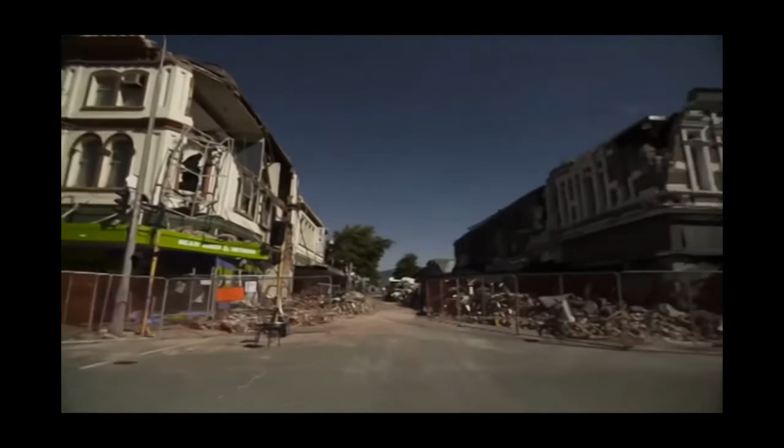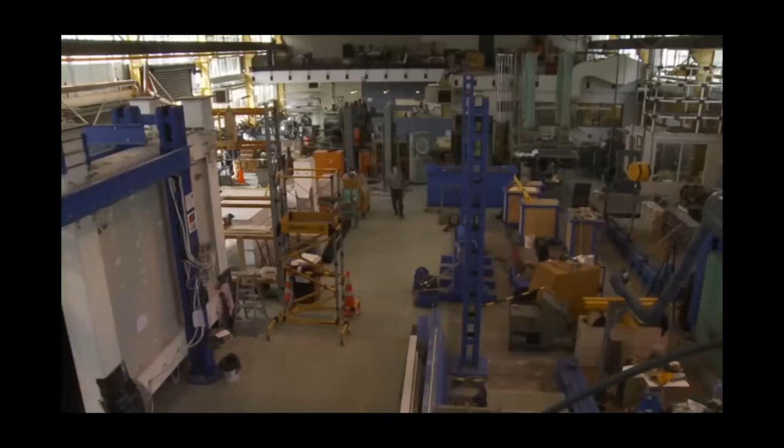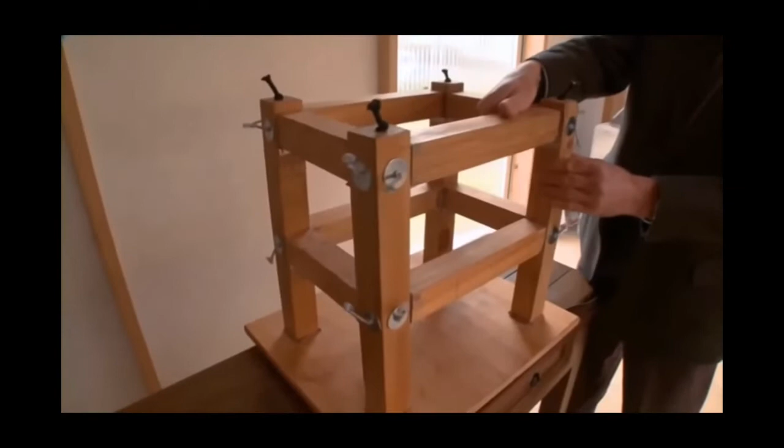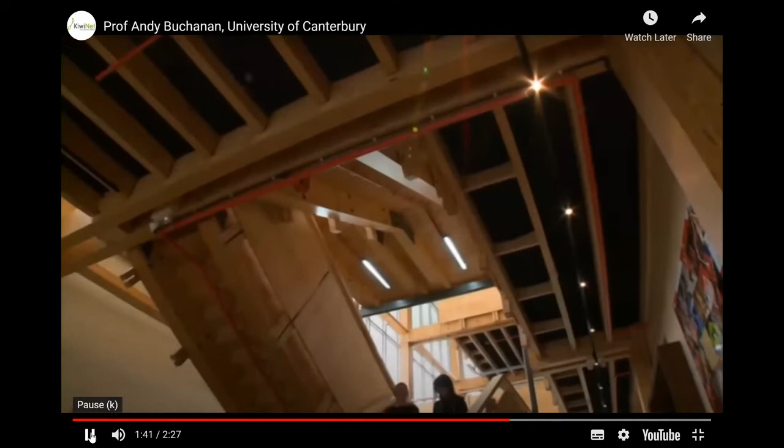Professor Andy Buchanan from the University of Canterbury is a world-leading researcher in the use of timber in earthquake-resistant buildings. 10 years ago, when we were doing earthquake engineering research, we realised that we had to somehow come up with a way of designing buildings that wouldn't be damaged after the earthquake. And the concrete people were doing it, the steel people were doing it, and we said, let's try it in wood. And the whole idea was this: if we have an earthquake and the building gets shaken about, it snaps right back to where it started. Well, I've been lucky enough to travel overseas with Andy to Canada and Japan, which are both wood-centric economies, and also they've got a very severe earthquake problem. And he's a world guru, basically. We got $5 million of industry money. We went to the government, they matched that money, and we then had an R&D program which has resulted in buildings like this. It's a renewable resource, it's sustainable, it's lightweight, it's strong. In terms of earthquake performance, or fire safety, or cost, wood can match steel or concrete. But in addition to that, we've got the low energy and the low carbon footprint of the wood buildings. Working with industry from day one, Professor Buchanan is creating technologies that will change the way timber is used in construction around the world. The university got involved because it could immediately see that there was commercial potential out of research. The world is watching what's happening here in New Zealand. Timber buildings used to be thought of as 2-3-story buildings. Now there are 5-6-story buildings. There's a 10-story building just been finished in Australia, even 30-story buildings in wood. There's this enormous demand for tall timber buildings around the world for reasons of sustainability and renewability and low carbon. But what the world doesn't have is a way of making these buildings earthquake-proof. So that's what we've got. Technology is so good it'll become a worldwide phenomenon. It's a perfect example of what can be done with clever scientists at a university, aided with a commercialisation function, meeting a market need.

So moving on from Andy's career at the university, he's since gone back into commercial practice, and I've certainly appreciated the sort of case studies and fantastic examples that have been coming out from his business in recent years since that video was shot. So without further ado, I'll hand over to Andy to bring his presentation. Thanks, Andy. Let's go, guys.

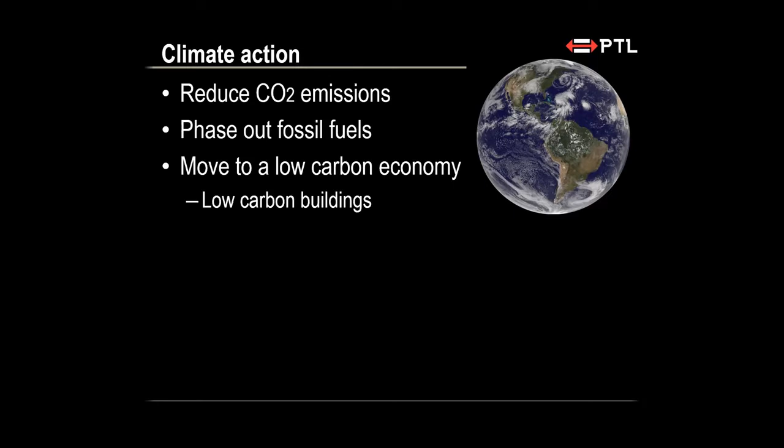If we think about climate action, you know all this. There's enormous pressure on us to reduce carbon dioxide emissions, and the only way to do that is to phase out fossil fuels. Of course, we can plant a few trees to offset, but that doesn't solve the problem. We have to stop using fossil fuels, and we've got to move to a low carbon economy. And the thrust of this talk is using low carbon buildings as part of that low carbon economy. And I'm going to quantify all of this, and let's see where we go. So what I'm really talking about is very simple. We're just talking about using wood instead of concrete or steel.

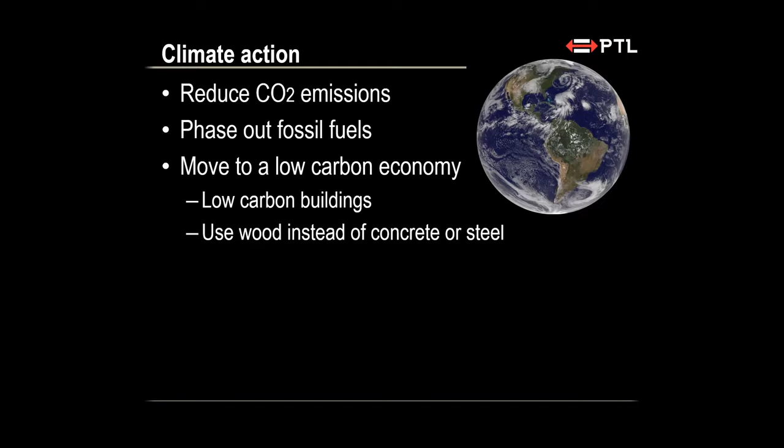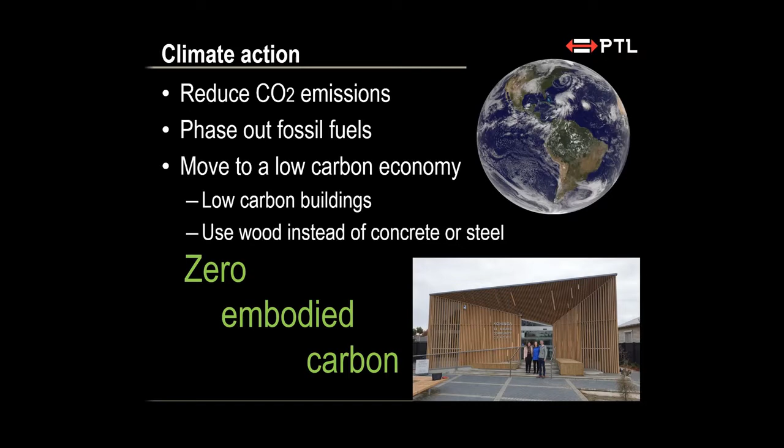And what we want to be able to do is to make buildings which have got zero embodied carbon. So I'm really just talking about embodied carbon, which is the carbon consequences of producing the building materials. And so this little building you can see there, I'll give a little case study of that later, but that's the St Albans Community Centre in Christchurch. And there the carbon sequestered in the wood, or stored in the wood, more than offsets all the carbon emissions from making the other materials.

So let's go ahead. As I said, I'm now talking about embodied carbon emissions using low carbon materials. And there are two parts to it, because there's what we might call the storage effect, or the biologists talk about carbon sequestration or sequestered carbon. And that's the carbon which is stored in the building materials. In addition to that, there's another benefit, which is what I call the substitution effect, because if we use wood instead of steel or concrete, then we have substituted, and that means another contribution that hasn't come through. And so I'll talk more about that as we go on.

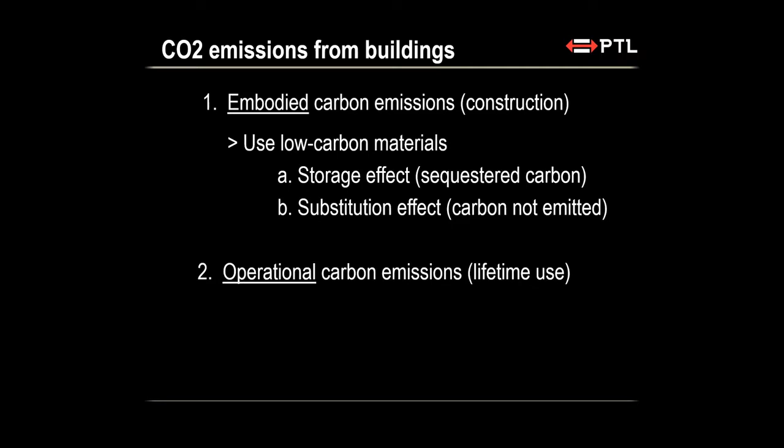Now, of course, in terms of the carbon footprint of a building, the embodied carbon is something which happens when the building is built, and it's there as long as the building exists. But in addition to that, there are the operational carbon emissions for the whole lifetime of the building. And I'm not looking at those now. What I'm doing in this talk is I'm only looking at embodied carbon, but I have to acknowledge that if we want to have low carbon buildings, we've got to go to a lot of effort to provide thermal insulation and manage the energy so that we reduce those emissions as well. And of course, that can be done with passive houses and other such technology.

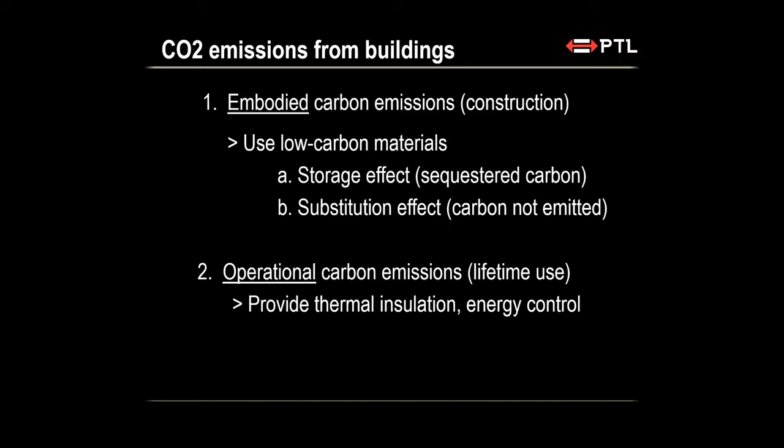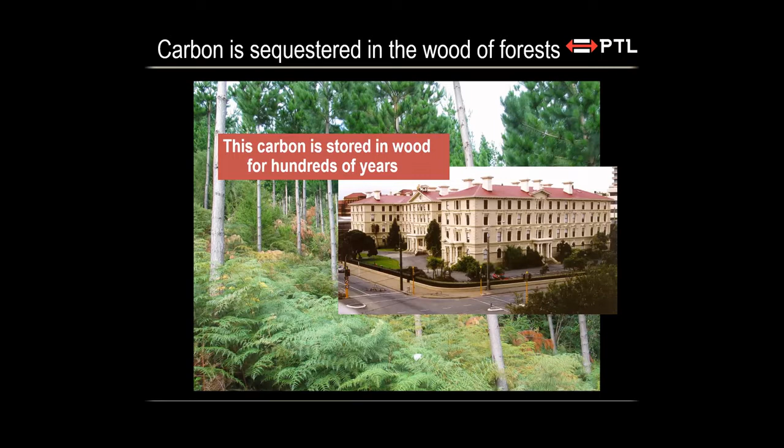The carbon lasts for hundreds of years. You all know this building, the old government buildings in Wellington, is 150 years old, and the carbon in that wood is still there, just as it was when the building was built. Let's just have a few numbers on this. Dry wood is 50% carbon. Of course, wood is a complex organic material. It's made up of cellulose and hemicellulose and lignin. Those are all organic compounds, but half of it is carbon. And a cubic meter of dry wood weighs half a ton, 500 kilograms. And half of that means that it stores 250 kilograms of carbon, C.

Now, carbon accounting around the world now is not done in terms of tons of carbon. It's done in terms of tons of carbon dioxide equivalent. So we've got to take the 250 and multiply by 44/12, because the atomic weight of carbon is 12 and the atomic weight of oxygen is 16, and so CO2 is 44 and C is 12. This is a simple calculation, but some people who are doing calculations of carbon offset forget to do this. So it means that the 250 kilograms of carbon in a cubic meter of wood is about 920 kilograms of carbon dioxide equivalent. So 1 cubic meter of wood offsets about 1 ton of carbon dioxide. And that's the sum that gets done.

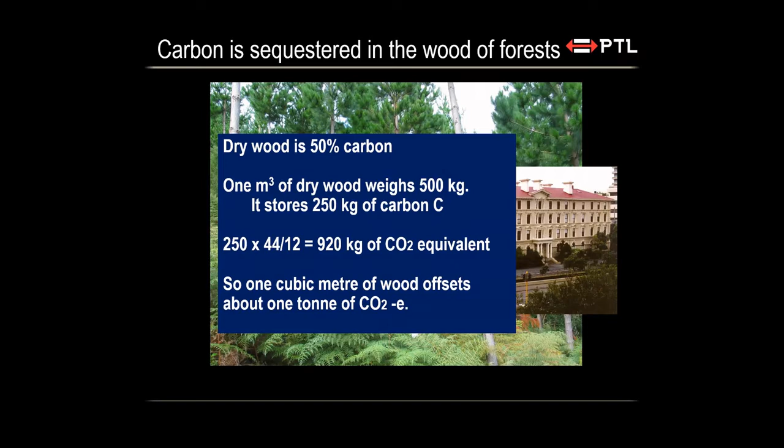When you buy your Air New Zealand ticket and you tick the box for a carbon offset, the people behind the scenes are making this calculation and figuring out how many tons of carbon dioxide are emitted from your flight to Queenstown, and they then use that to figure out how many trees they have to plant. That's how it works.

Okay, let's look at some new technology. Wood, we're looking at mass timber, large lumps of wood, like glued laminated timber, big lumps glued together. It's been around for a while.

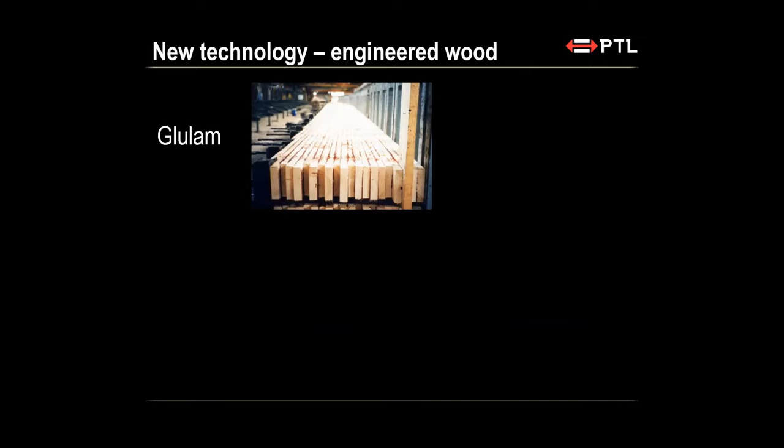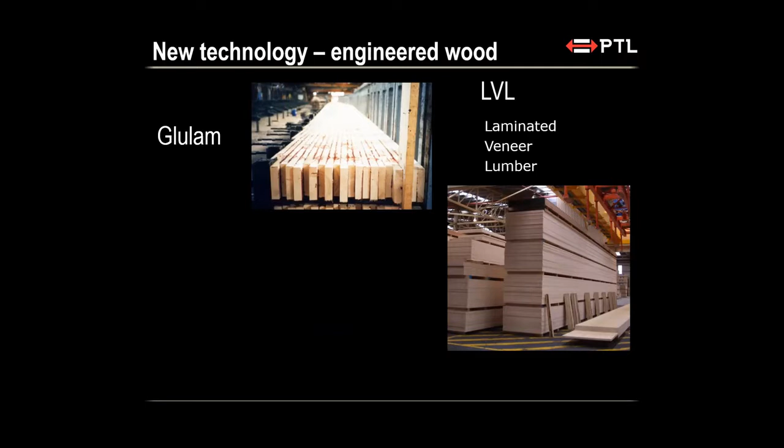Laminated veneer lumber has been around for 20 years or so, and we've got 3 factories in New Zealand making LVL, laminated veneer lumber: Carter Holt Harvey at Marsden Point, Nelson Pine Industries in Nelson, and Juken Nissho in Masterton. So that's to make things that are long and strong.

But the new boy on the block is cross-laminated timber. And cross-laminated timber is like thick plywood. It's all a bit like plywood, because LVL is like thin layers. It's like plywood with all the veneers, all the grain running in the same direction. CLT is like thick plywood because it's not made of thin layers, it's made of 4x2s laid on edge. But they're alternating layers, and so it's the perfect thing for great big panels.

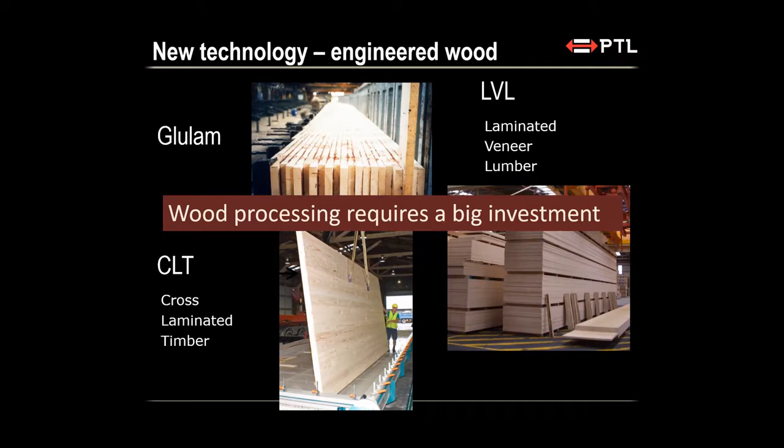Just something that's going to come up again later. To make any of these products now, to do it economically, it requires a big investment, because if it's all done by hand, it's so expensive it won't happen. But companies who are making these products now are all robotic, and it requires a lot of money to get going.

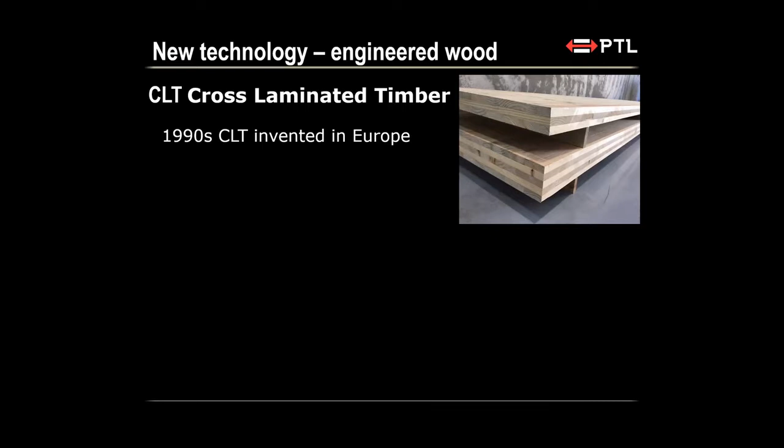And in 2012, Robin Jack set up XLAM in Nelson, which started to become successful. Then they were bought out by Hyne Timber in Australia, who closed down the Nelson factory. So XLAM are now in Australia at Albury-Wodonga. I took that photograph in their factory just last month.

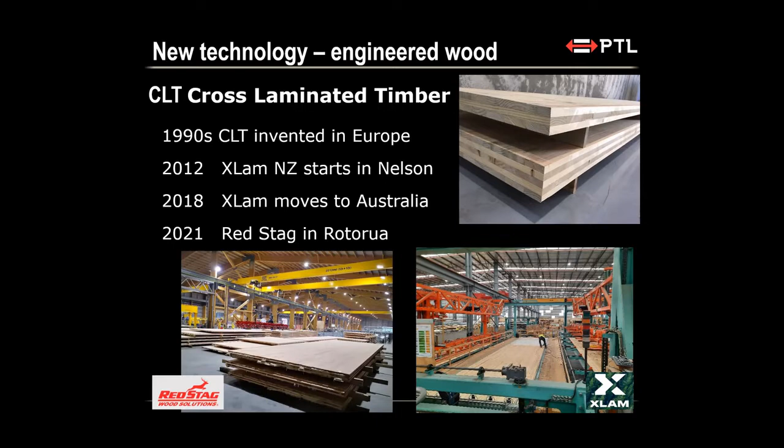But the new boys on the block are Red Stag in Rotorua, and last year they completed their factory and they're gearing up now. And so we have 2 big factories in Australasia, with some more on the way in Australia. There's new factories coming in Adelaide and Perth. So that's a product I'll be talking quite a lot about.

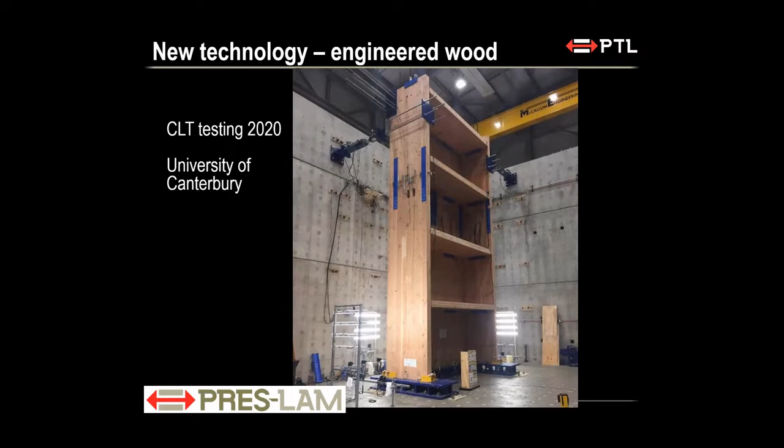Just by way of background, as Brendan mentioned, between 2008 and 2013, before I left the university, we had a company called STIC, the Structural Timber Innovation Company, which brought together research at Canterbury, Auckland and Sydney, and that's where we developed this Pres-Lam system that you've seen, which has got an important place for seismic design of timber buildings, but not for all timber buildings. You don't need that, but the technology's there if we need it.

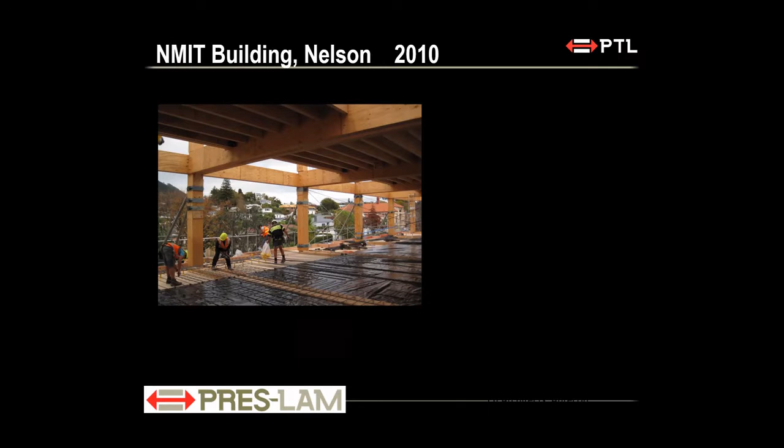The first building using that technology was the NMIT, Nelson Marlborough Institute of Technology building in Nelson, opened in 2010. And that was built back in the days when Jim Anderton was Minister of Forestry. Remember Jim Anderton? He was very much in favour of promoting timber buildings. And this building got a $1 million subsidy from the government because of the new technology. That was the post-tensioned or Pres-Lam walls being erected, and that's the finished building today. It's a lovely building.

So let's get on to the topic. The topic is, what are the carbon benefits of building more timber buildings in New Zealand? That's the question. There's a bit going on in the background because MBIE has a Building for Climate Change division, and they have a whole of life embodied carbon emissions reduction framework, and as you note, it's whole of life, and also embodied, and they're working to reduce emissions from buildings during their construction.

And I've been talking to them a bit, and they became aware of a paper which I'd written 20 years ago, in 1999, wood-based building materials and atmospheric carbon emissions, which I wrote with a co-author, an American student, Bry Levine. We published that, and it went under the radar at the time because no one was much interested. But now it's come up again, and the Ministry for Primary Industries, the Forest Service people, asked me if I could update that. So I've done that for them, and that's what this talk is all about.

And the report I wrote for them was published last week in the latest journal from the New Zealand Timber Design Society. So there are copies out there, and I can make them available if you want a written report. But let's get on with the show. Back in the STIC days, we started looking at buildings, and this was a new building, a concrete building under construction at the University of Canterbury 10, 15 years ago now.

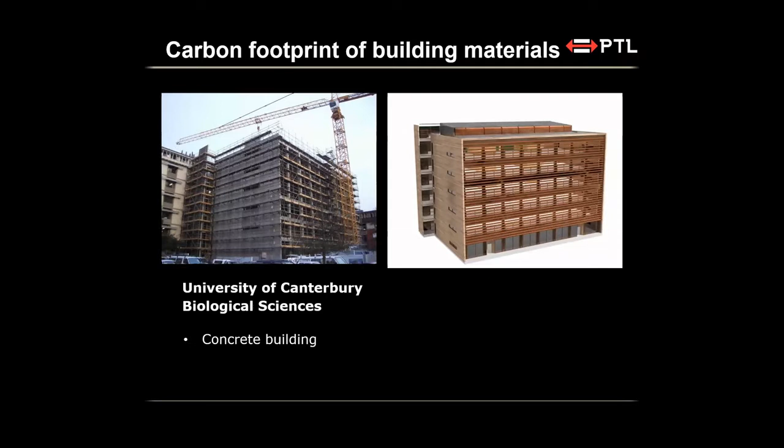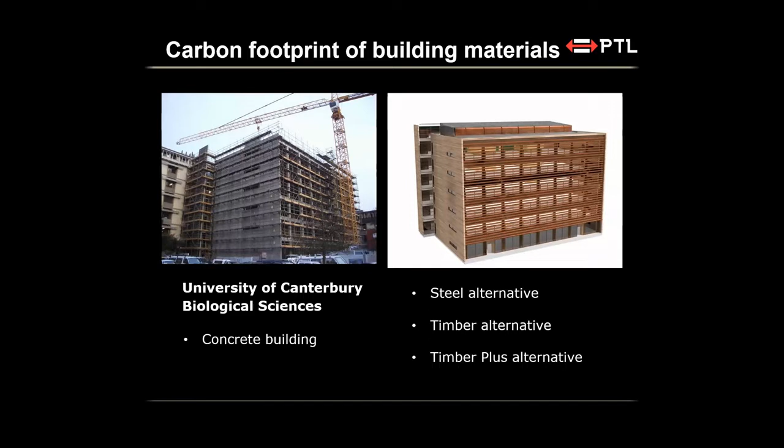But what we did with that concrete building, we had all the numbers, quantities, and we did 3 new designs. We designed a steel alternative and a timber alternative and something special we called the Timber Plus alternative. And if we compare those 4 options, this is what it looks like. And this is looking at the embodied carbon dioxide in all of the building materials.

And so we've got a graph like this. We've got the concrete building, the steel building, the timber building, and the Timber Plus building. And the vertical axis is tons of carbon dioxide. And that blue color is concrete, most in the concrete building, less in the others. The red color is steel, most in the steel building, as you'd expect.

What's the yellow? Well, the yellow for this building was the aluminium window frames and the whole aluminium facade. It was huge. And that's why, after doing this, we thought, well, there's got to be a better way. So that's when we moved to the Timber Plus, and we said, let's get away from the aluminium and let's look at timber, wood for window frames. And the wood is the negative item here because that sequestered carbon is a negative emission.

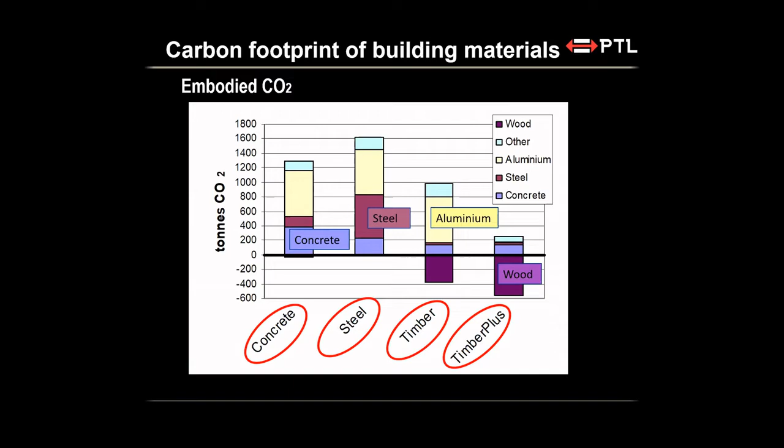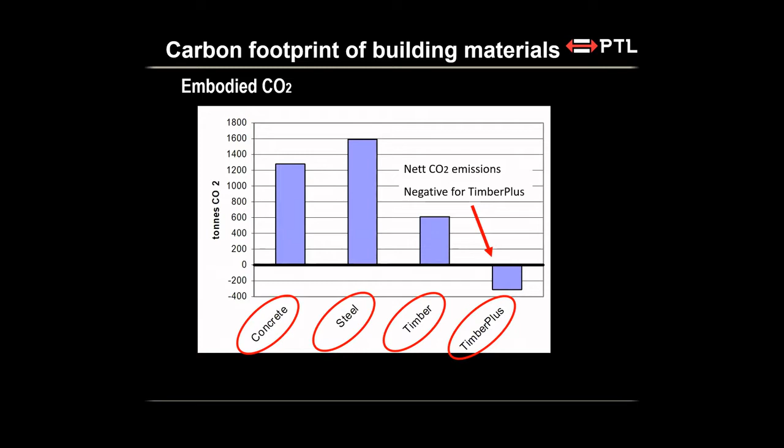And if we simplify that, we can just look at the net values, and you can see here there's your concrete, steel, timber, and the Timber Plus building. And so if there's enough wood in the building, we end up with carbon 0 or even negative. And so that's what we did for one building.

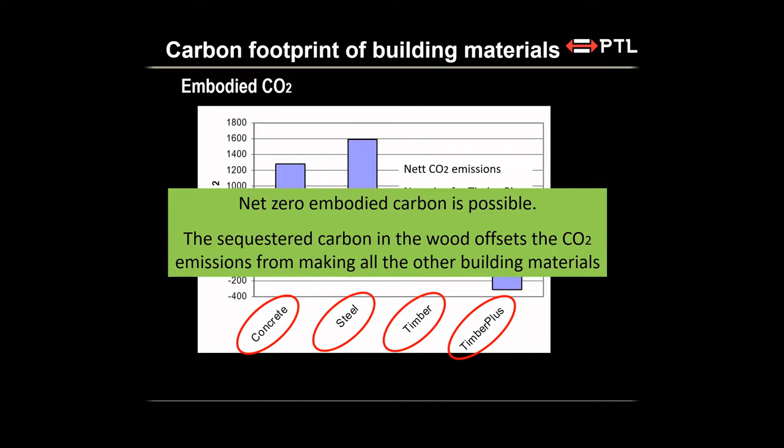Net zero embodied carbon is possible. And in that case, the sequestered carbon or the stored carbon in the wood offsets the CO2 emissions from making all the other building materials, including the glass in the windows and the GIB and the wall lining and the corrugated iron on the roof, and in that case, the reinforced concrete foundations. So that's an old story.

I'm now going into the procedure that I went through 20 years ago, and I've just gone through it again, and it's quite a few. There's a lot of steps in this, and there's a lot of accounting, and so I'm going to put up a lot of spreadsheets and show a lot of numbers, but I won't dwell on them too much, because we want to get out the other end.

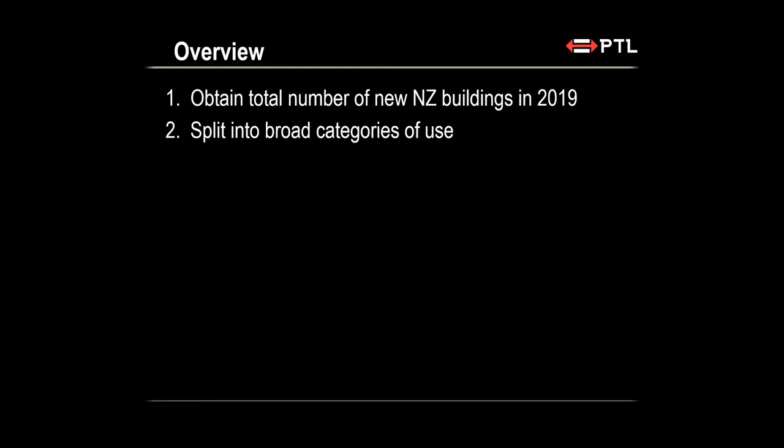But what we wanted to do is we went to Statistics New Zealand to find the total number of new buildings in New Zealand in 2019, which was the latest year we had the data for. And then we split those into broad categories of use, as you'll see: residential, commercial, industrial, farm buildings. And for each one of those categories, we did some guesswork.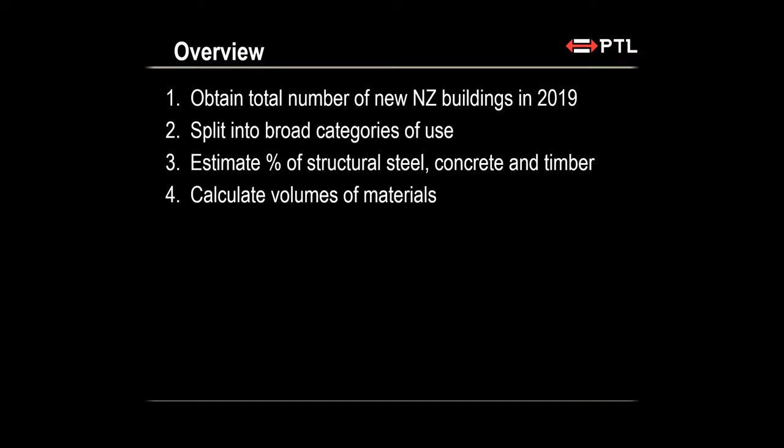We estimated, we guessed roughly what is the percentage of structural steel and concrete and timber in the structure of those buildings. And on the basis of that, we knew the floor area, so we could calculate the volumes of structural steel and concrete and timber. And then what we did was to propose a new mix of structural materials. I'll describe this all in a bit more detail, but these are the steps. Which meant we then recalculated the volume of materials.

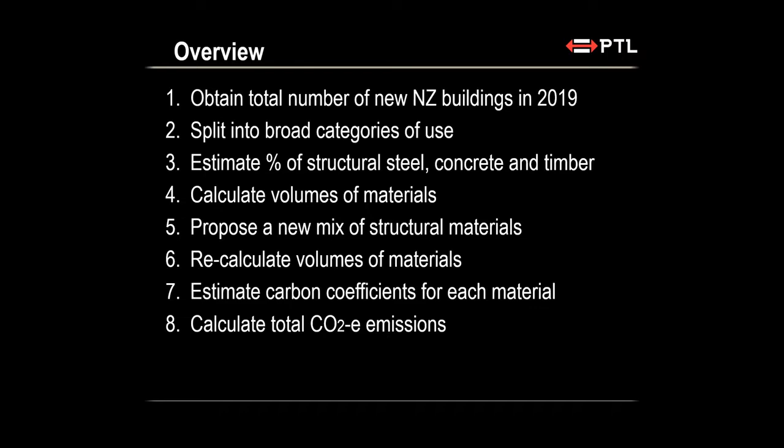And then we took the carbon coefficients for each material, because there's information out there on how many tons of CO2 are emitted when you produce a cubic meter of concrete or a ton of steel. And using all those numbers, we could calculate the total CO2 equivalent emissions for all the buildings built in New Zealand in 2019. And then to finish off, we had to calculate how much wood we would need to do all of that, making that change from steel and concrete to wood. So that's what we're going to do now. We're going to work through those steps.

There are some limitations, quite a lot. This is not a full life cycle assessment, an LCA. Absolutely not. That would be a much bigger job. We have not included the operational emissions. We have not included the construction and transport energy, and we have not included the end-of-life options.

So this is only looking at the structural materials. It's a little different from that previous study I looked at where we included all the materials. This time around, we've made the assumption that the facade of the building, the roofing on the building, the internal fit out is going to be the same whether the building structure is concrete or steel or wood. And to keep things simple, we've also assumed that there's no change to the concrete foundations.

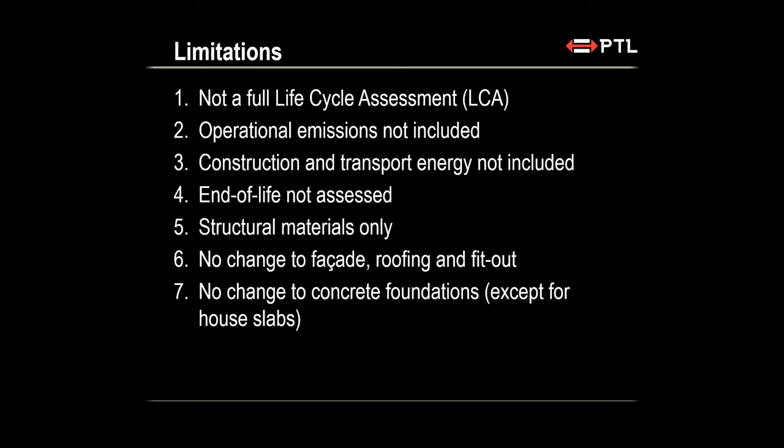So these are the categories. I took all of the buildings in New Zealand and we just broke them down into houses and apartment type buildings, which is apartments, townhouses, retirement homes, hostels, motels, and then office, education, commercial buildings, which includes healthcare, shops, schools, hospitality, all those kinds of buildings, and then factories and storage buildings and farm buildings.

So the only way to do this guesstimate is to break it down. So this whole exercise is a big picture, a high level, big picture guesstimate of what would happen. Because there's a lot of estimation in here, but we have to do these things to see whether it's worth proceeding. Okay, you're going to see these 5 categories again and again in the next few slides.

So the 2019 figures, those are the 5 categories which I split them into, and you can see here the number, the value and the floor area. So in 2019, there were 21,000 houses built and 12,000 apartment style buildings and 1,400 office and so on. And the value, you can see the numbers there, but the number we're most interested in are the floor areas,

because the other thing I've done in this study is I've just assumed that next year and the year after, we will build the same number of buildings as we built in 2019. So there's all kinds of assumptions in here, but you have to do it if you want to make progress. So those are the floor areas.

Then the structural materials. Now it starts to get a bit more detailed and a bit more interesting. And these are the guesstimates I talked about, because if I just go back again, that data there is all data from Statistics New Zealand. There's no guesswork there. I've just taken their tables. But we go to the next slide. Now I'm starting to make some estimates. So the same 5 categories.

And if we look at house foundations, for example, I've just gone out to the industry and talked to engineers and builders that I know. And roughly speaking, in 2019, let's say 90% of houses were concrete slab on grade, and 10% were some type of timber construction, a pole house or a light timber frame elevated style. So that's an estimate. And the same thing for apartment buildings.

That's much more difficult, but I watch these going up right now in Christchurch. There are tilt panel and concrete masonry apartments, and there are light timber frame apartments. So 50-50. And for office, commercial, educational buildings, 50-50. In the Christchurch rebuild, I'd say it's more like 75% steel and 25% concrete, a huge number of steel buildings. But over the country, I've said 50-50.

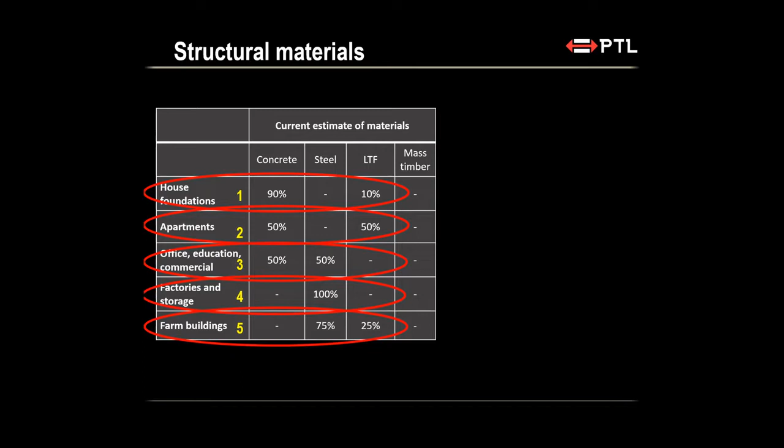Factory and storage buildings, they're all made of steel, portal frames. Farm buildings, guesstimate again, mostly steel, some timber framing. So those are the starting numbers. Now I'm going to put up another column here, which are the possible future materials.

And so here I'm saying for the house foundations, let's say that we could cut the concrete slab down to half, and let's start using mass timber or light timber framing for those, 50-50. For apartments, let's say we stop using concrete and we make them all in timber. And for commercial office buildings, instead of 50-50, let's cut that in half and go to half timber. For factories and storage buildings, let's again half timber, and a bit the same with farm buildings.

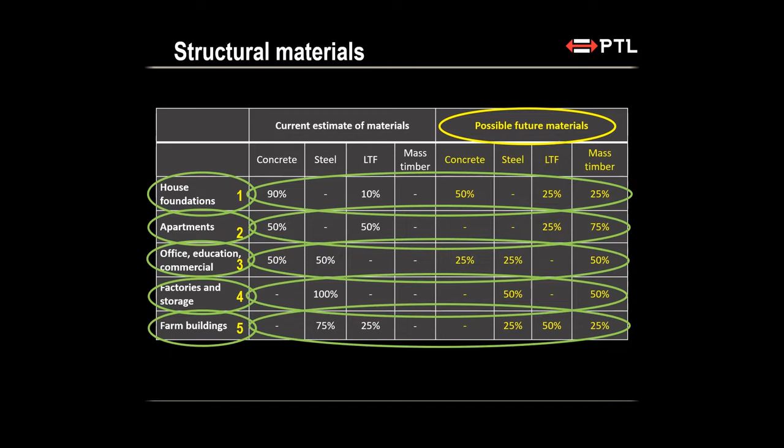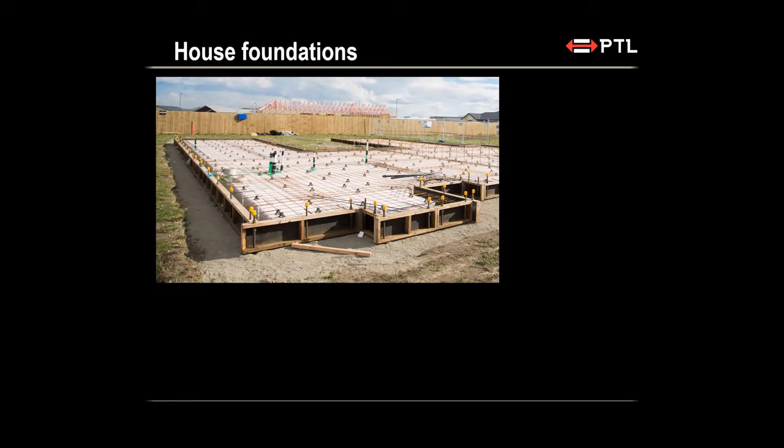So you can argue with these numbers. These are what-if numbers, but they're the numbers that give us the answers. So just as an example, most houses in Christchurch are built on something like that, rib raft, something like that, where the concrete is finished.

Concrete actually is the biggest problem because the cement and concrete industry is responsible for close to 10% of the global CO2 emissions, maybe 8%, 8, 9, 10. It's 3 times more than emissions from air travel, for example. It's huge. And concrete is great stuff.

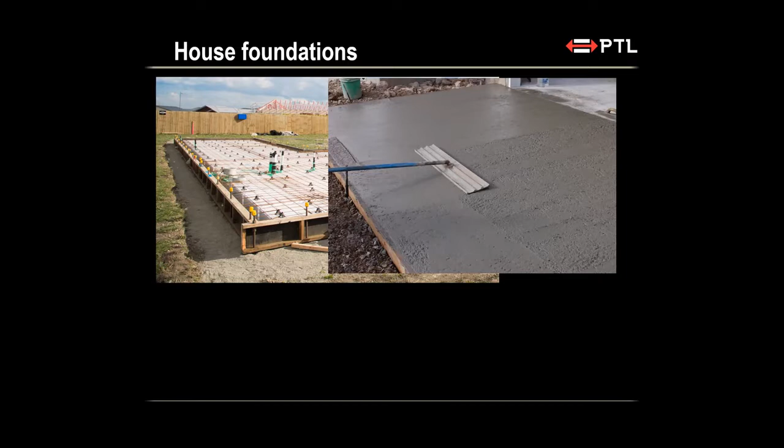It's wonderful stuff. And there's a lot of work going on looking at trying to come up with low carbon concrete, but with great difficulty. But my suggestion, and for houses, if I was building a new house right now, I'd do something like this.

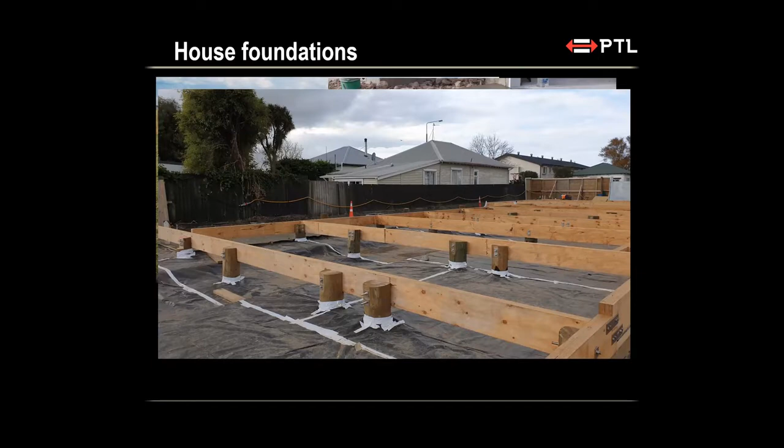Timber poles driven into the ground, no concrete at all, and timber beams, bearers and cross-laminated timber, CLT floor slabs. Why not do it like that? For apartment buildings, we see these buildings going up all over the country. We don't have to do that.

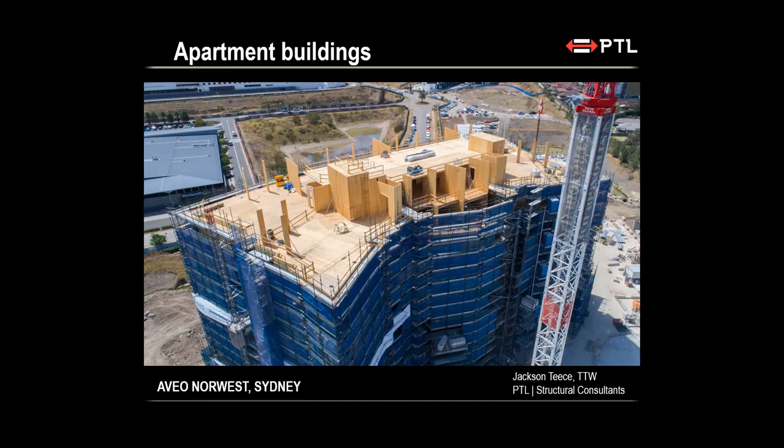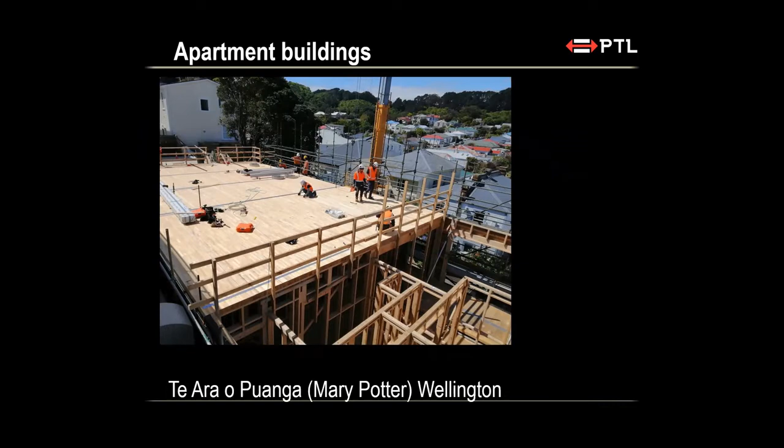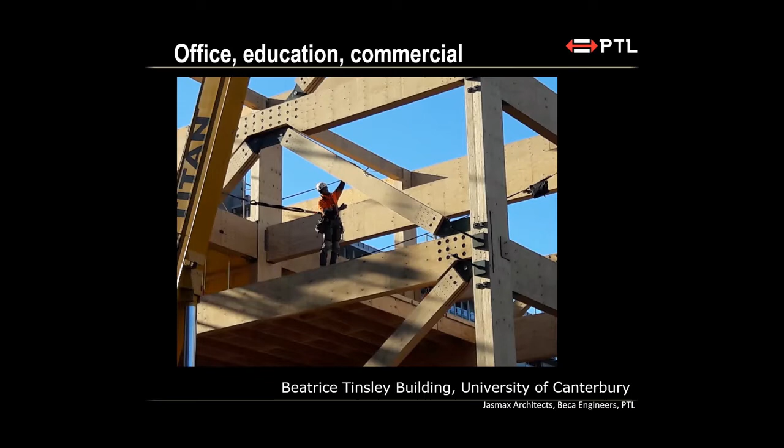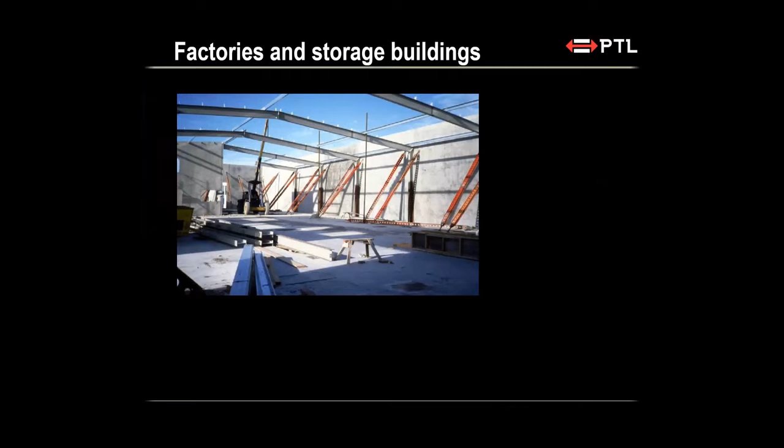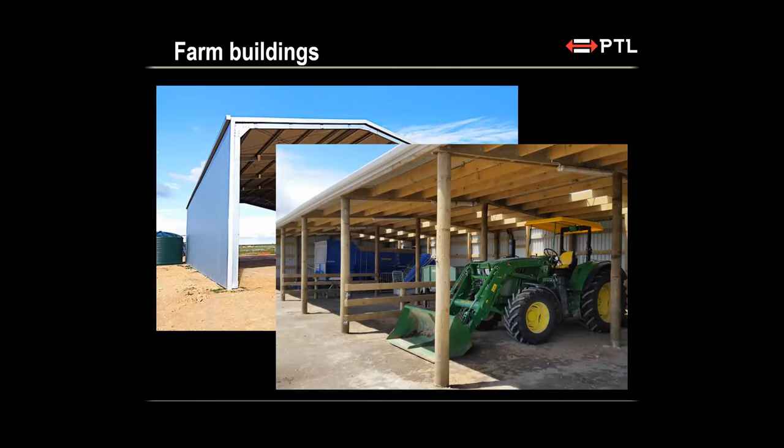Enough of that. Factories: as you know, nearly all industrial buildings look like that with steel portal frames, but there's no reason they can't be done in timber. And farm buildings, that's what we see, and there's no reason they can't be done like that, and a lot are being done like that. So those are the sorts of examples that I had when I made those previous assumptions.

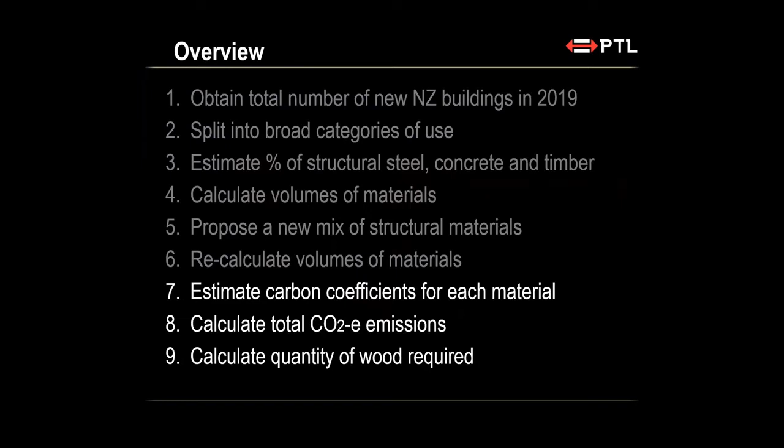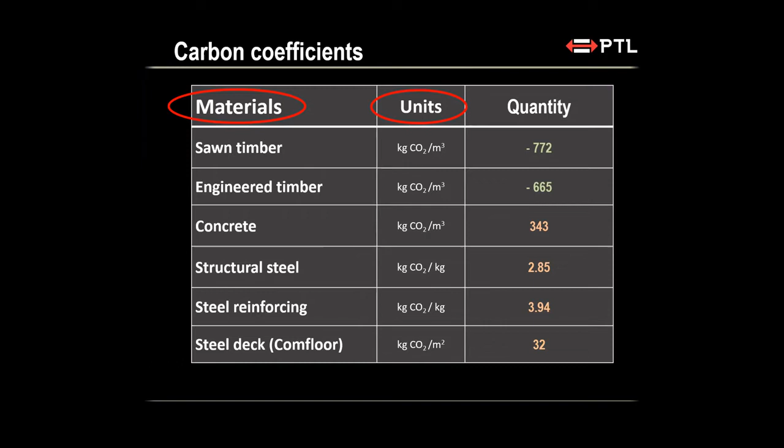So we're right back to our overview, and we're down to number 7. We've proposed a new mix, and we've calculated the volumes of materials. So we've still got 3 more steps to do to get to the answer. So let's keep going. In terms of carbon coefficients, we have numbers like this for the materials I'm talking about, sawn timber or engineered timber. By engineered timber, we mean glulam, LVL, CLT. They're all about the same. And we've got units, and you'll see the units are a bit different, and we've got the quantity.

And the numbers that we've got here are mostly coming from documents called EPDs. An EPD is an environmental product declaration. And luckily, because for a while it was a mess, now there are international standards for EPDs, and all of the main manufacturers of structural materials in New Zealand have produced environmental product declarations, one of the outputs of which is the carbon emissions, the embodied carbon in the manufacturing of the material. The EPDs do much more than that. They look at a whole range of environmental impacts of the material, but I'm only looking for one number there.

Those have been summarized in a chapter of the NZ Wood Design Guide, which you can get online very easily. And the other place where you can get this stuff, which I would recommend as being the easiest way to make these calculations, is the Naylor Love website, and there's free access to a calculator on there where you can do for one building what I've done for thousands of buildings. So let's carry on here.

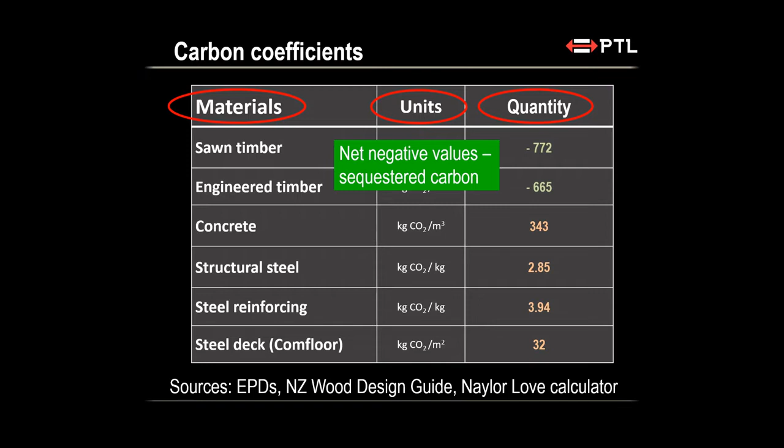What we see here is that for the timber, we've got the green numbers, which are negative values. So that's stored carbon, sequestered carbon. And for concrete and steel reinforcing, they're all positive numbers. The numbers can't be compared very easily because the units are different. For example, you can see there for concrete, it's a cubic meter of concrete. You remember me saying before, a cubic meter of wood resulted in about a ton of CO2 emissions being stored.

You can see from this, a cubic meter of concrete results in 343 kilograms, or a third of a ton of CO2 emissions. So you can compare those. I won't say any more about that, but the steel numbers are much less because the quantity surveyors measure steel in kilograms and tons, not in cubic meters. So we're looking at kilograms of CO2 per kilogram of steel.

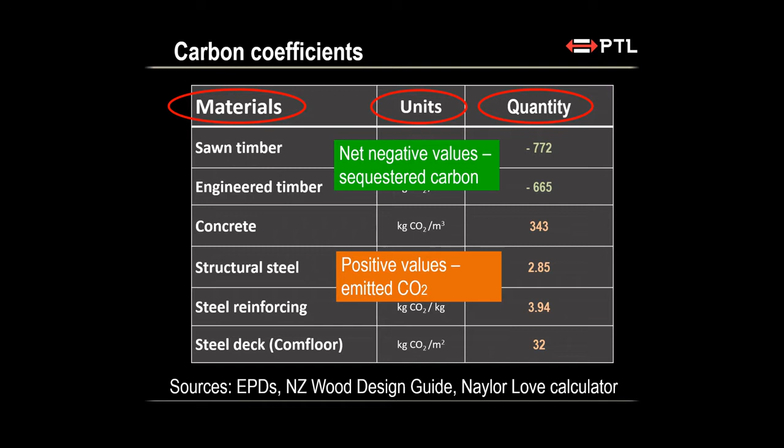So all I'm going to say here is that those numbers are not my numbers. They've come from elsewhere. So what I'm going to do now is combine those numbers with my building quantities. So let's just look at office buildings.

So if we look at office buildings, I now can come up with a table like this, where for the office buildings, I can look at the concrete office building, a steel office building, a light timber frame office building, or an engineered timber office building. And across the top, I've got these materials. And these numbers tell me how much concrete there is in a concrete building.

So if we look at concrete in a concrete building, there's about 0.2 of a cubic meter of concrete per square meter of floor area. And in a concrete building, there's about 8 kilograms of steel per square meter of floor area. But then if that building was not a concrete building, but a steel building, you can see how the numbers change. The way I got those is I went to a number of friendly quantity surveyors and builders, and I got quantities for a number of typical buildings, and we had to work those numbers out.

What we then did was we took the carbon coefficients from the previous slide and we multiplied the whole thing up. So for a steel building, for example, there's 0.12 cubic meters of concrete per square meter at 343 kilograms of CO2 emissions per cubic meter, and we multiplied those together. Then for the structural steel, the steel reinforcing, and the steel deck, the Comflor, we multiplied those numbers together. And we added up the middle row. And what did we end up with?

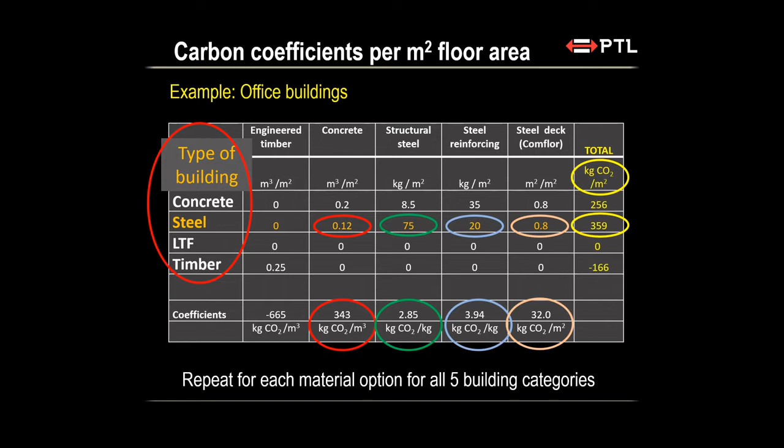This is all accounting. We repeated that for each material option for all 5 building categories, and we got some answers. What are the answers? Well, it looks like this. The same 5 categories for 2019, and the numbers now are how many thousand tons of carbon dioxide emissions from building all of the houses, apartments, commercial office buildings, factory buildings, and farm buildings built in New Zealand in 2019. And the total is 859,000 tons.

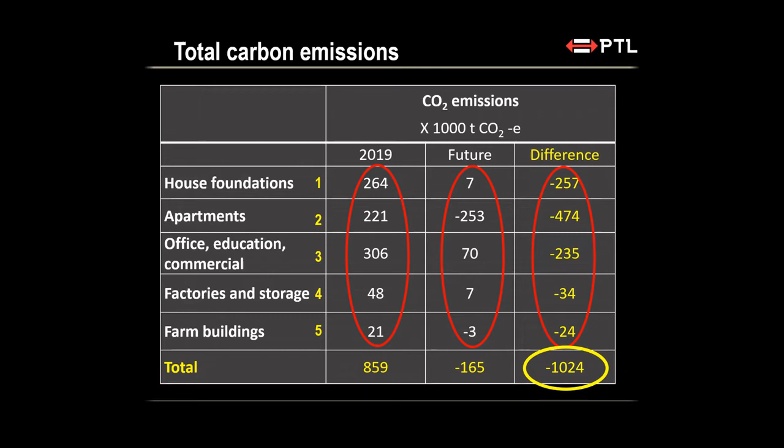Then we compared that with what if we used less concrete and less steel and more wood. It would come out to a negative number. And if we look at the difference between those 2 columns, we end up with these numbers. The number on the bottom right, 1,024, is the finished number, because it means if we made all these changes to all these buildings, we would have a reduction of 1 megaton of carbon dioxide in the New Zealand economy during that year.

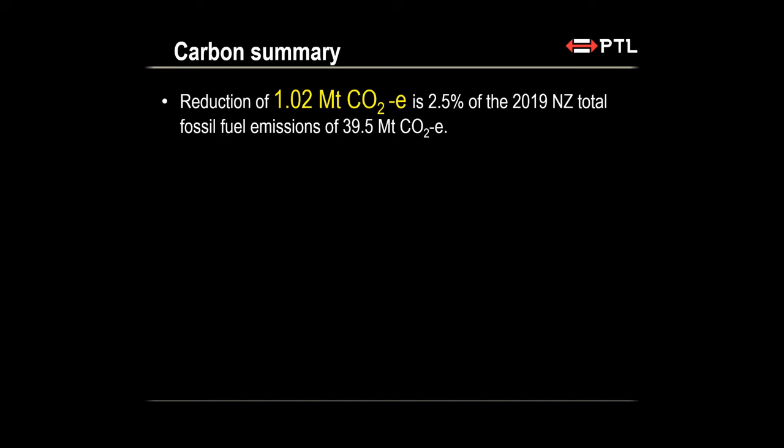It's not a huge number, but it's not a bad number. It's about 2.5% of the total fossil fuel emissions of 39.5 megatons of CO2. I haven't put methane in here, I don't want to get involved in that argument. So that's quite a big number. The biggest contribution is actually from apartment buildings with CLT floors and walls and light timber framing. The current market price is actually more like 80, but it's been hovering around 50.

If it was $50 a ton, the value of this reduction is about $50 million. Half of this benefit comes from storage of carbon in the wood, which is the sequestration effect, and the other half comes from the reduced carbon emissions from not making steel and concrete.

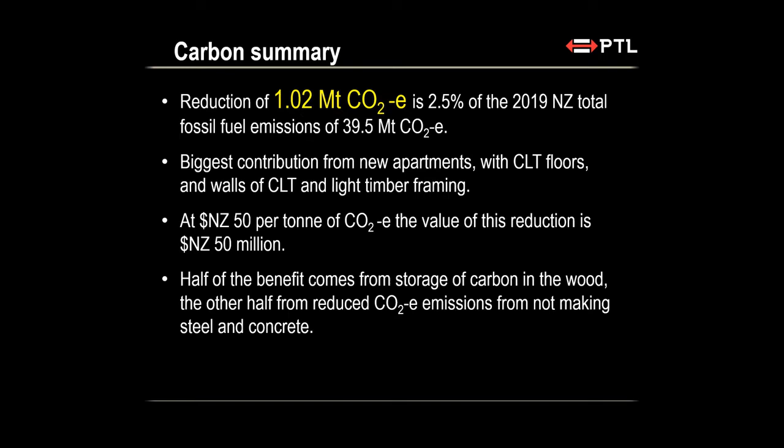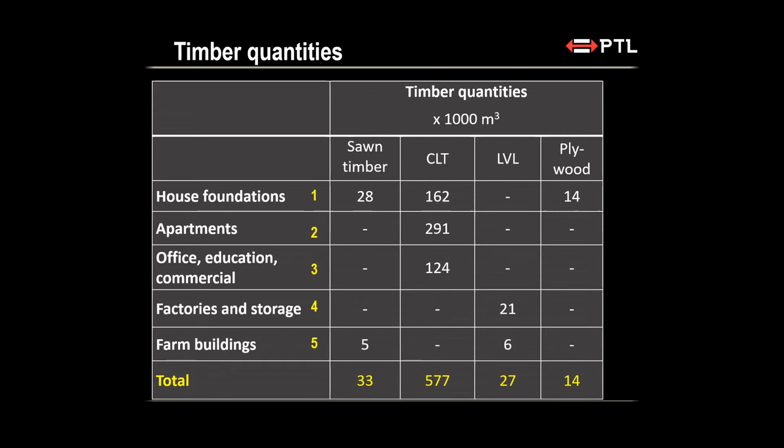So there we go. Now there's one more thing we want to do. We want to see how much wood is involved. So this is how much extra wood we would need in each of these categories. And you can see here, I've divided this up into sawn timber and CLT, LVL, and plywood. And we've come up with some numbers down the bottom here. And we add those numbers up, and the total, so we would need an additional 650,000 cubic meters of wood products to make this change that we're talking about.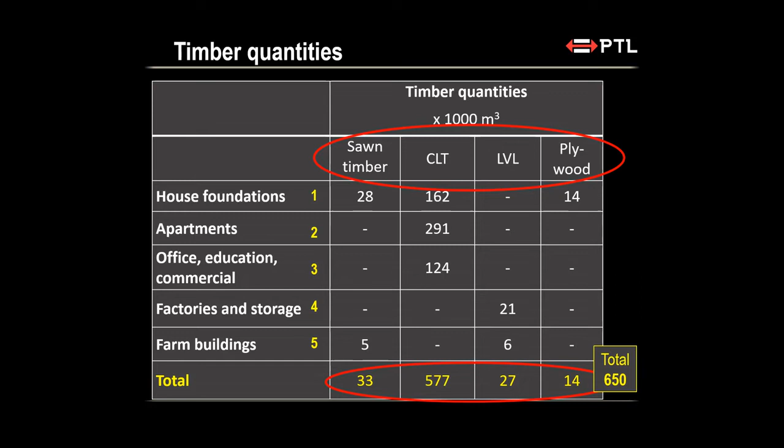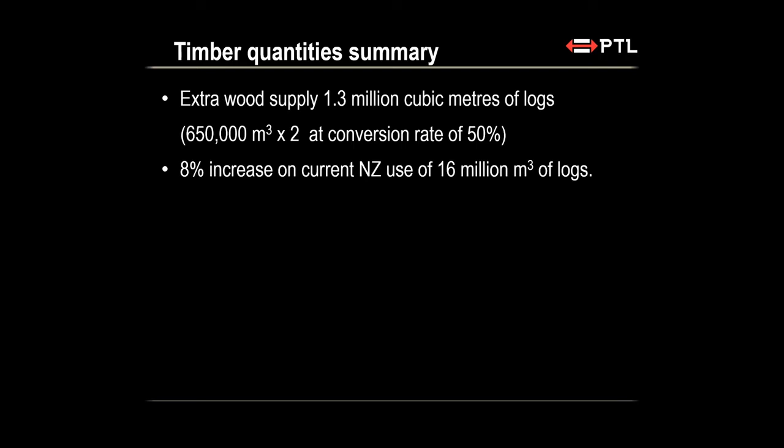What does that number mean? Well, because when you turn logs into manufactured wood, you lose half the wood, it goes into sawdust and fuel and stuff like that. So we'd need an extra 1.3 million cubic meters of logs. And that's only 8% of the current New Zealand usage. Or another way of looking at it, if you look at those piles of logs being exported at the wharves and all over the country, we'd have to retain 6% of that in New Zealand to make these changes that I'm talking about. Doesn't sound like very much.

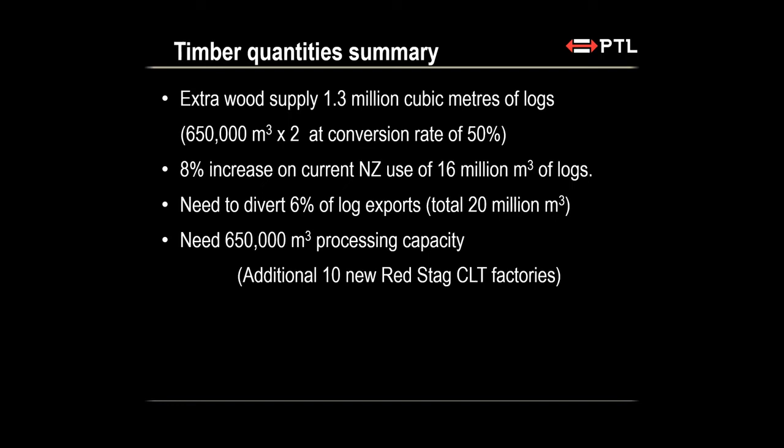But one of the big hurdles is processing capacity, because we would have to have processing capacity to saw and manufacture and treat and process 650,000 cubic meters. And that's about 10 times the size of the new Red Stag CLT factory in Rotorua. And I don't know how much that's cost, but it's cost a lot of money, and it's taken quite a few years from whoa to go. So that is actually the biggest hurdle in the whole thing.

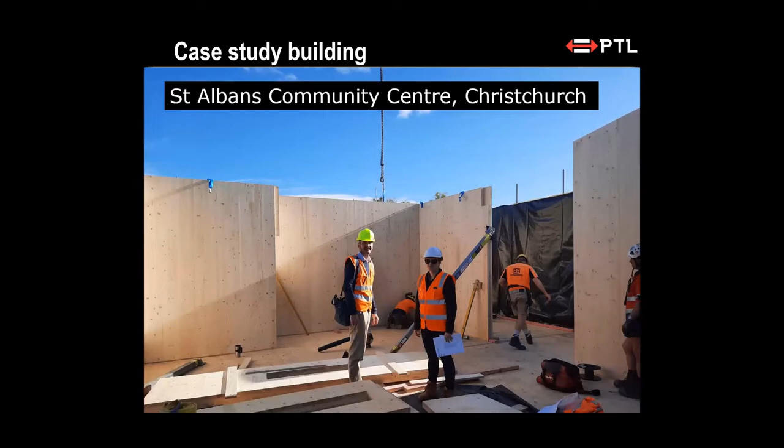Just a little case study. I'll go back to St Albans again, because it's a favourite building of mine. If you're in Christchurch, go and have a look at it. It's open every day. That's the building being built with Daniel and Emma, the PTL engineers, of the walls being stood up. And that's Lianne Dalziel, the Christchurch mayor, opening the building. And at the opening, I hadn't done my homework, because I asked her, you didn't say anything about the carbon. She said, nobody told me what to say. So I said, well, here's the carbon story on this, which I've since worked out.

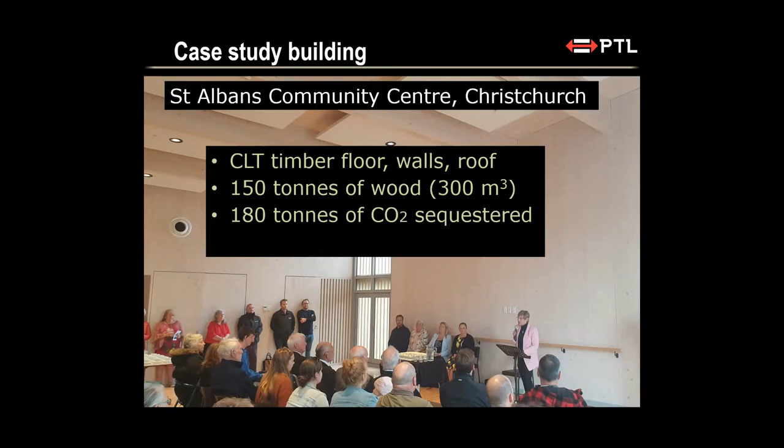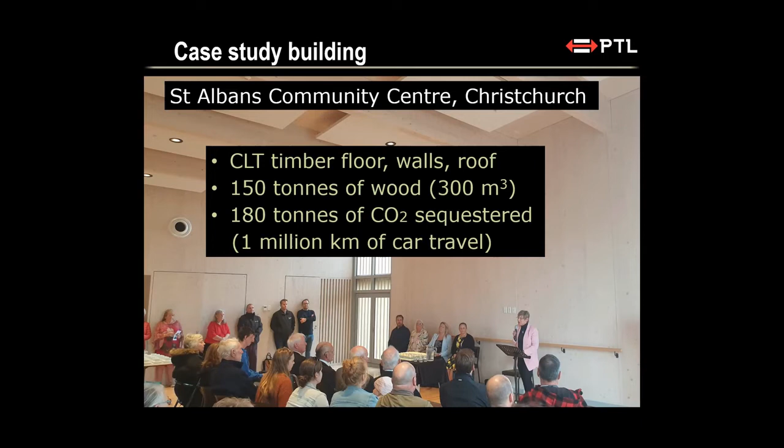It was very easy. The CLT, there's a huge amount of wood in this building, 150 tons, 300 cubic meters. There's 180 tons of CO2 sequestered in that one building. And I said to Lianne, that would be 1 million kilometers of your personal car driving that would be offset by building this one building in wood. So that's a nice little story.

So the conclusions are simply these. If about half of new buildings used wood instead of concrete and steel, houses, apartments, schools, offices, factories, farm buildings, we would have about 1 million ton reduction in CO2 emissions, which is about 2.5% of the national CO2 emissions. And I read in yesterday's paper that internationally, airline travel globally is 2.5% of CO2 emissions. And I look up Air New Zealand, that looks about 3%. So if we did all of this, that would be equivalent to shutting down the New Zealand airline industry. Not that I want to do that, but that's what it means.

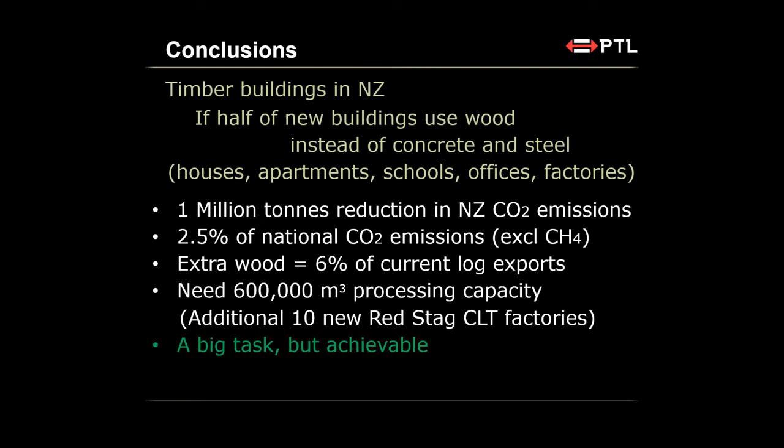And the extra wood would be 6% of log exports, which is 10 new Red Stag factories. It's a big task, but it could be done. That's all. Thank you.